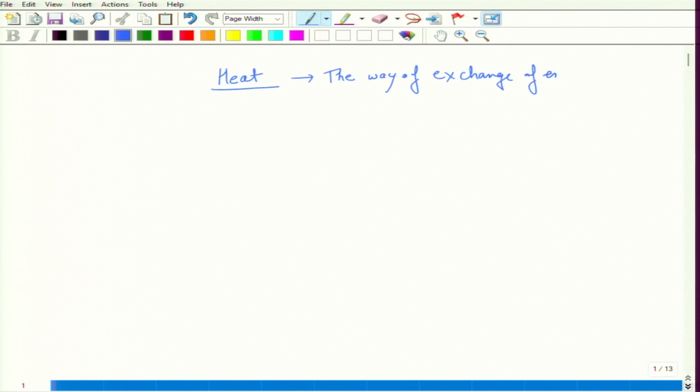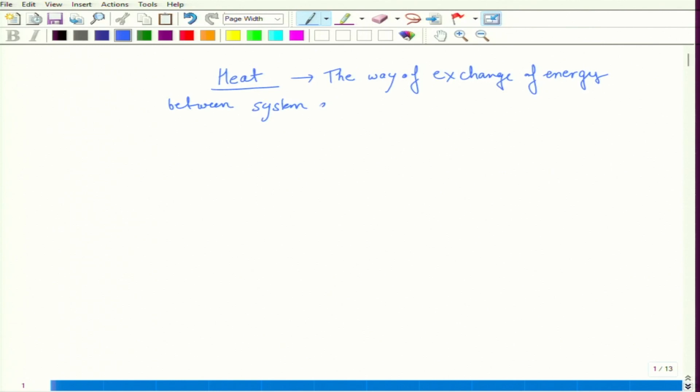So heat is basically the way of exchange of energy between system and surrounding. Heat can also be the transfer of

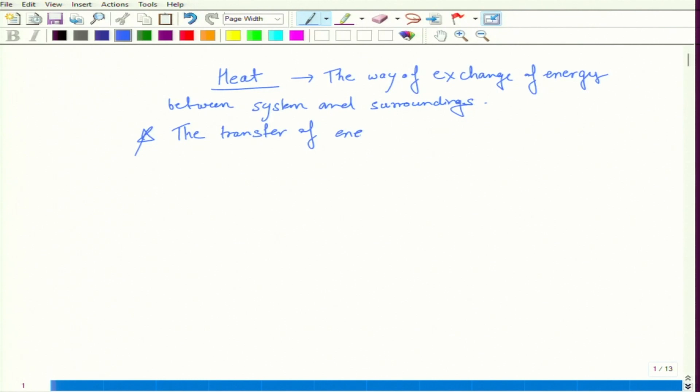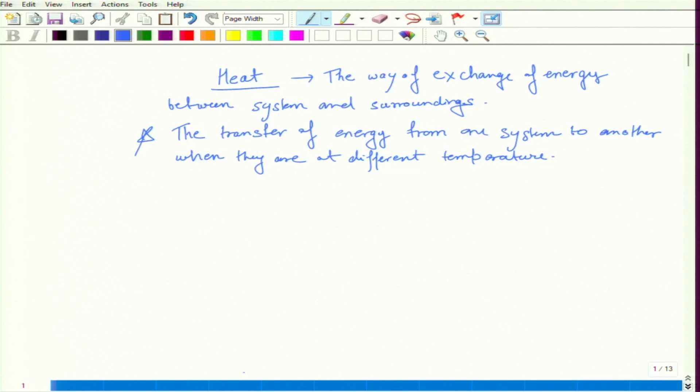energy from one system to another when they are at different temperatures. So the notion of heat lies in the fact that there should be a temperature gradient

due to which there is an energy transfer, and this energy transfer we call heat. So the important thing about heat is that you have to feel it, because it is the internal energy of the system. So you cannot see it.

You cannot see heat, the transfer of heat you cannot see by the naked eye. You can only feel it when some body is at higher temperature. If you touch a hot object, there is a transfer of heat, and due to this you feel hot. That hotness is due to the energy stored inside that body, because it is at higher temperature and is hot in nature. So the concept of heat is that you only feel it.

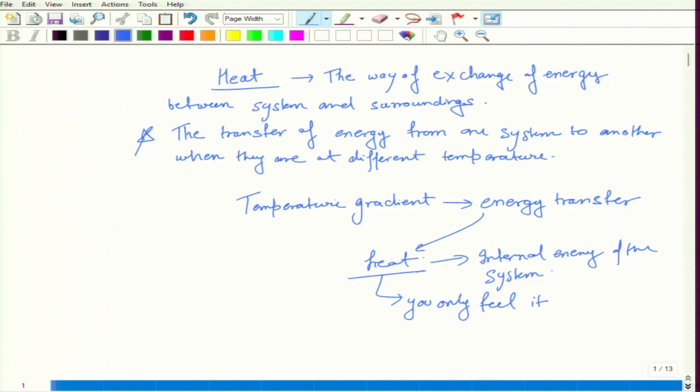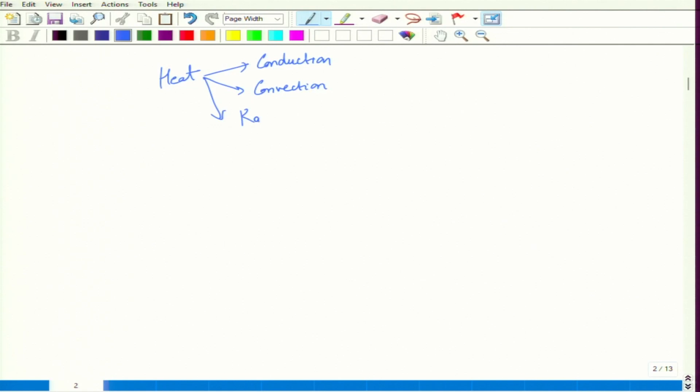Okay. So there are different ways in which heat is transferred: conduction, convection, and radiation. In case of conduction, it is the vibration of the molecules.

Suppose it is a solid body; at the microscopic level these molecules are arranged like this, and there is a temperature gradient such that T1 is greater than T2. Due to this there is movement between these particles, and due to this vibration the energy is transferred from this to this, this to this, and so on. So that is what we call conduction.

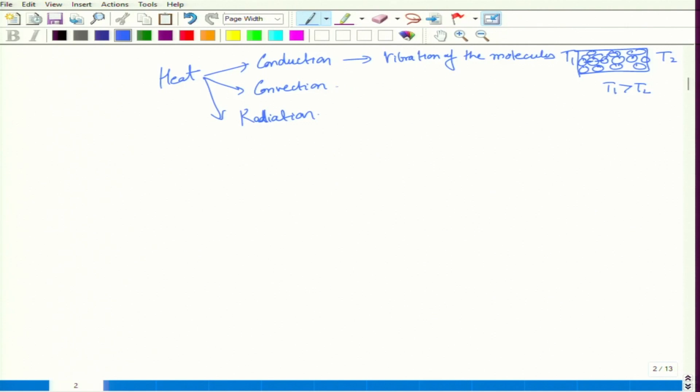In case of convection, there is actual movement of molecules. If you see boiling, that is a case of convection.

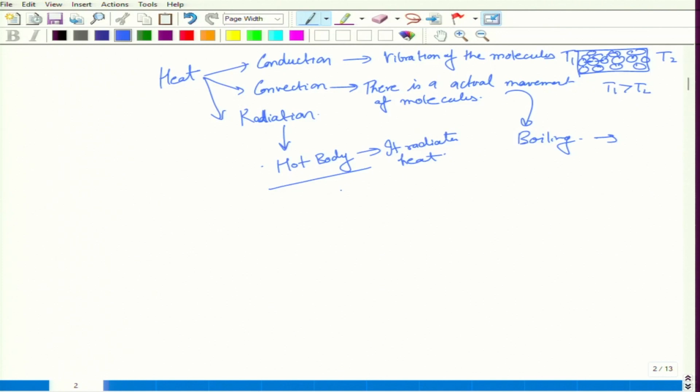In case of radiation, when we have a hot body, it radiates heat based on the wavelength of the radiation emitted from the hot body. So these are the different processes through which there is a transfer of heat, and the main point you shouldn't forget is that a temperature difference should be there.

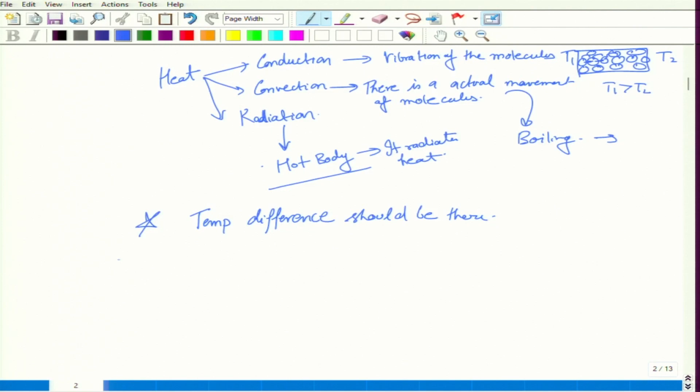So in the last class we discussed internal energy, and in today's class we are going to discuss Q, that is heat, and in the upcoming lecture we are going to discuss work.

So we have already discussed this, we are currently discussing this, and in future we will discuss work. Once we are clear with all of these concepts, we are fully equipped to go on to the first law of thermodynamics.

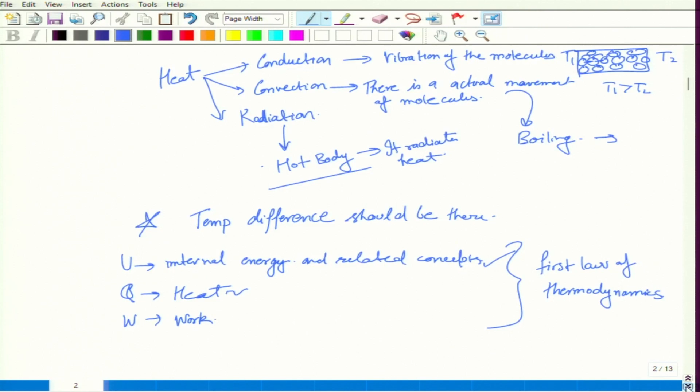Okay. So when the concept of heat arises, there should be a definite concept, in solid bodies or in any fluids, of specific heat. So in thermodynamics we are going to discuss the specific heat capacities of a gas and the range of specific heat capacities.

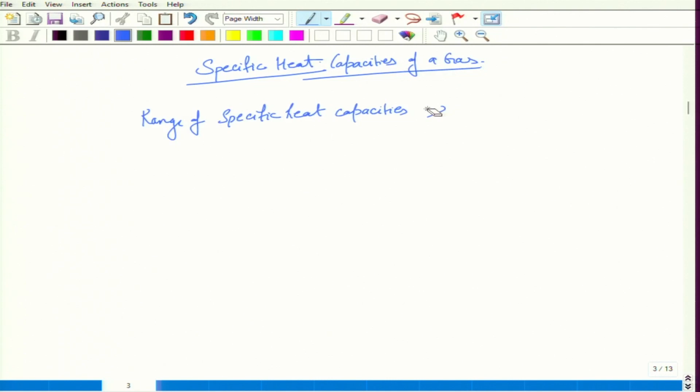So I am telling you the range of specific heat capacities of an ideal gas. It varies from 0 to infinity. In this discussion we constrain ourselves to the ideal gas. Specific heat C is defined as Q divided by m into delta T.

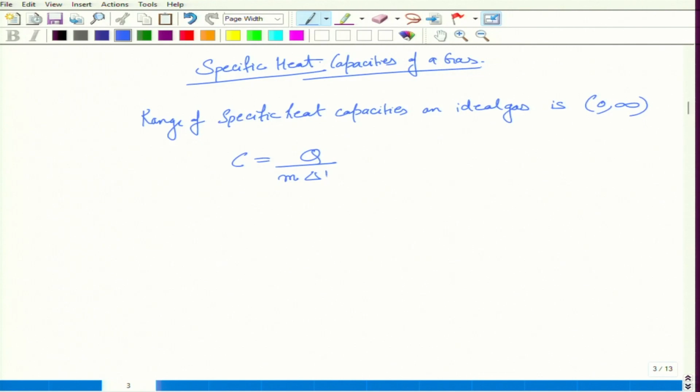So what is specific heat? The heat required to raise the temperature of 1 gram of gas by 1 degree centigrade. That is what we call specific heat.

So the two processes that need to be discussed: first, the isothermal process. An isothermal process is the process in which there is no change in

temperature, that means delta T equals 0, and so for the isothermal process C is infinity. If you put delta T equal to 0 in this equation, C is infinity.

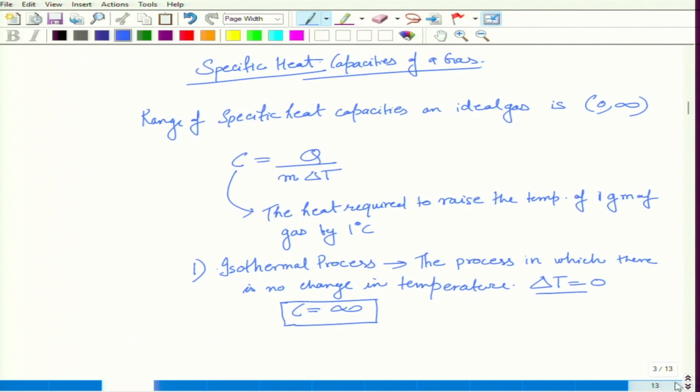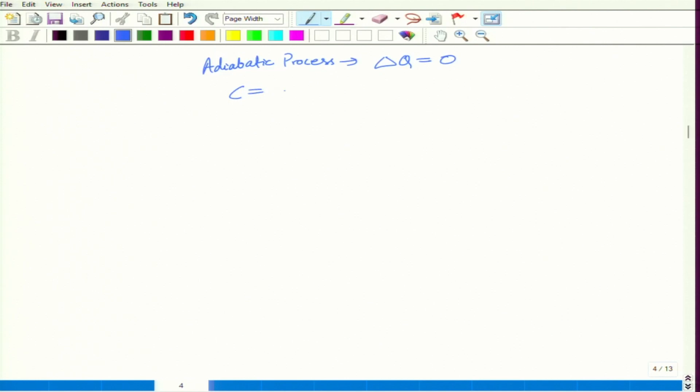In case of the adiabatic process, there is no exchange of heat, so delta Q is 0. So C for the adiabatic process is delta Q by m into delta T, and since delta Q is 0, C is 0.

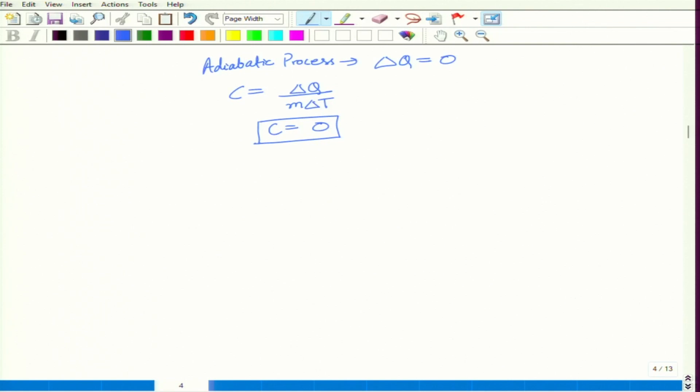So from these two processes we can see that the range of specific heat goes from 0 to infinity. So the range of C is 0 to infinity.

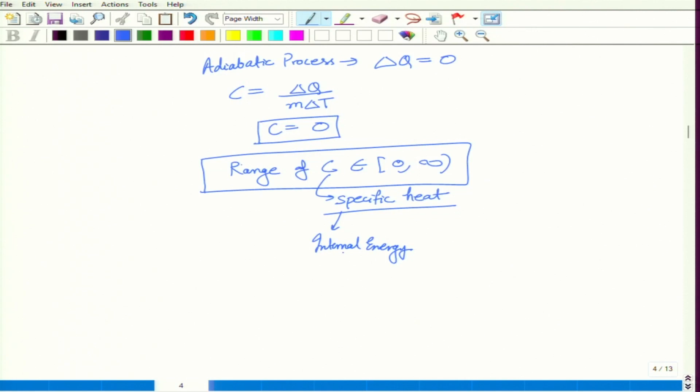So now that is all about the concept related to specific heat. This concept is important to understand, so we are able to relate the different specific heats with the internal energy. For now we are restricting ourselves to how specific heat is related to internal energy.

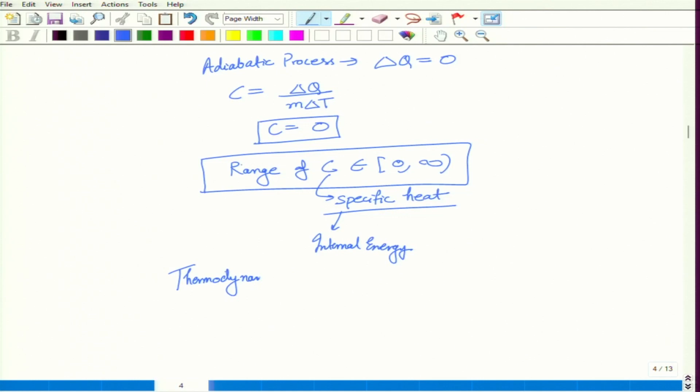Okay. So there are other thermodynamic processes, that is isochoric or isobaric. These are important because the specific heat in case of isochoric and isobaric will tell us how we can relate it to the different forms of energy.

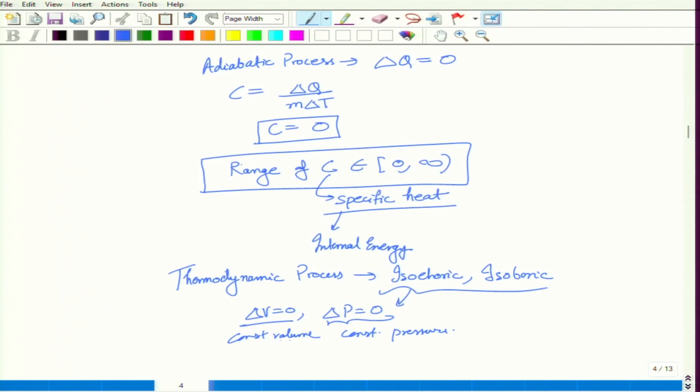So in case of isochoric process delta V is 0, and in case of isobaric process delta P is 0. When delta V is 0, that is the case of constant volume, and when delta P is 0, that is the case of constant pressure.

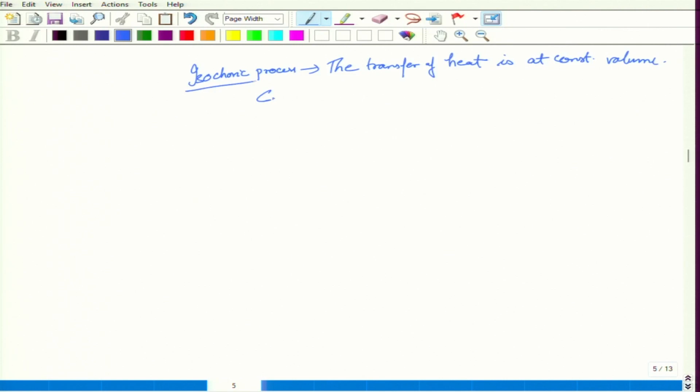So it means that there is a transfer of heat in case of isochoric process. The transfer of heat is at constant volume, and because it is isochoric, we call it Cv, with subscript V, and that is delta Q by m into delta T.

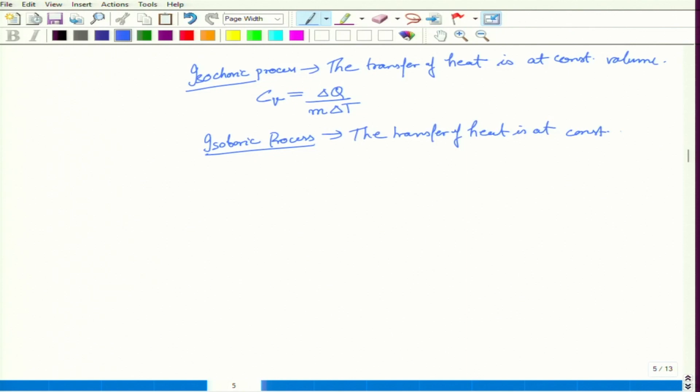So okay. In case of isobaric process, the transfer of heat is at constant pressure, which means that we are calling this Cp, and that is delta Q by m delta T.

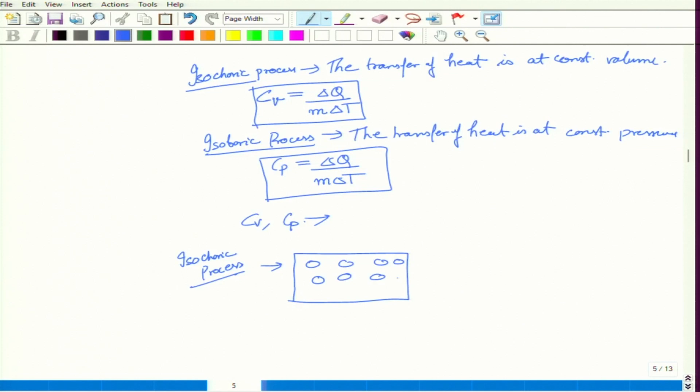So in order to understand the concept of Cv and Cp, we need to feel it. So how can we feel it? Suppose we have a body, and in case of isochoric process we have some gas molecules inside this box, but the volume is fixed, but there should be some temperature gradient due to which there is some transfer of heat.

So there is some T here and some T here, or we can say that some energy is supplied to this body uniformly in order to increase the temperature of the gas molecules inside this box by 1 degree centigrade. The temperature is increasing, but the volume of this box is constant. So that is the case of isochoric process.

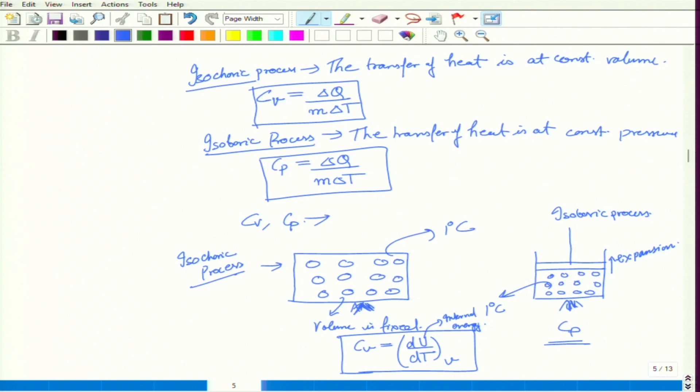So this is dU. So what I am relating is, this is nothing but internal energy. Okay. So we have discussed different processes: adiabatic, isochoric, isobaric and isothermal.

In case of adiabatic process we know delta Q is 0, which implies that C in adiabatic process is always 0. In case of isochoric process it is delta Q by m into delta T at constant volume, and for isobaric also delta Q by m into delta T but at constant pressure. In the case of isothermal, delta T should be 0, so C is going to be infinite.

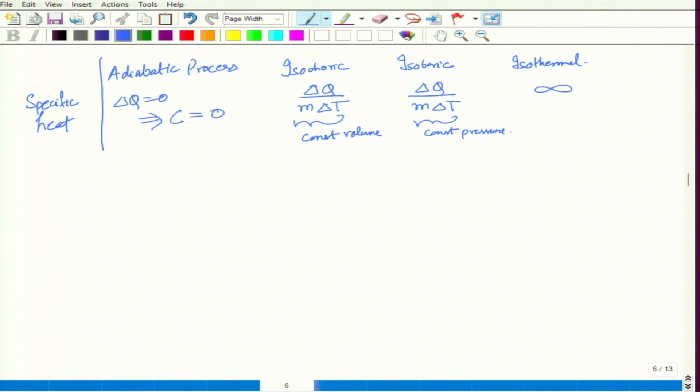So you need to keep this in your mind, and we'll proceed from here and try to relate the specific heat with the degrees of freedom in the next class.